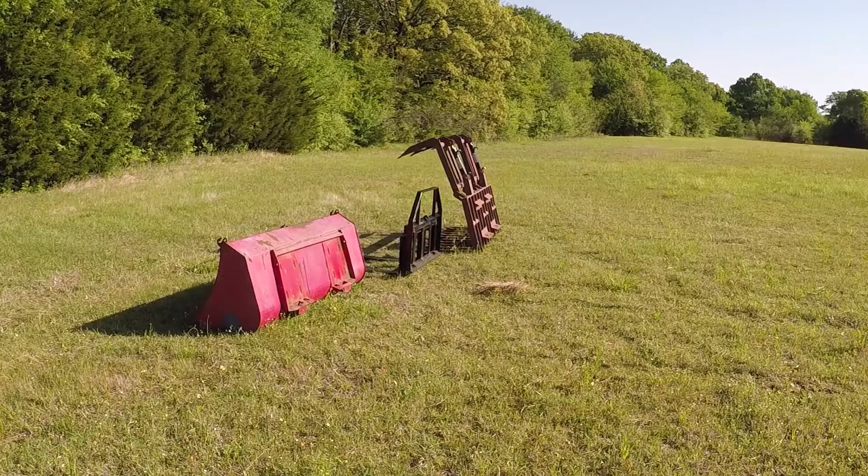In this video I'm going to tell you everything I know about the skid steer quick attach system, my tractor equipped with it. I built two attachments, a pallet fork and a grapple with hydraulic jaws to fit this system, and it fitted perfectly, both of them.

The reason for this video is to save you some trouble if you build your own attachment, so you build it universal and it will fit any skid steer quick attach like this setup over here. My understanding, Bobcat invented this setup and they called it the Bob-Tach. The patent expired in the mid-90s, I believe, and all the companies got together and they decided to standardize the system. So if you buy a tractor or a skid steer, any attachment that you could buy that's designed for this system should fit it.

However, from my experience, I visited several dealers for equipment like this, and I discovered there are little differences in dimension. So if you have a tractor like this one or any other tractor, and you build an attachment tight fit to go on this system, in the future, if you upgrade the tractor or the skid steer, the attachment that you built may not fit the quick attach system that you have. I will take the camera closer and I'll explain to you about these dimensional differences.

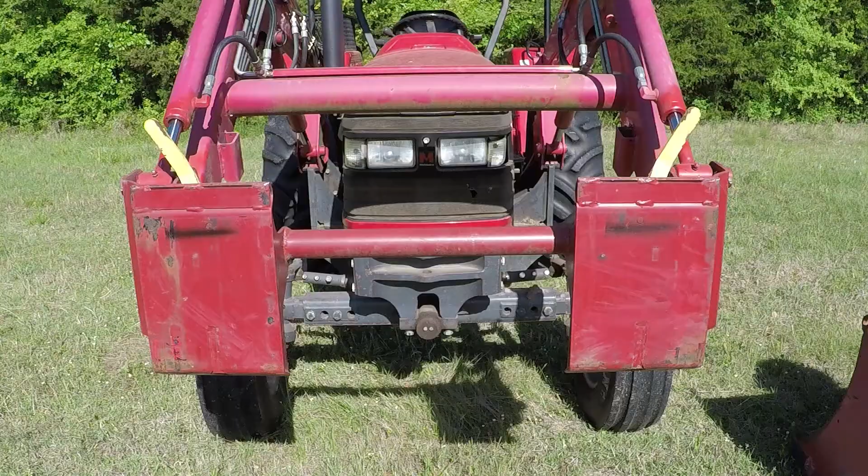I repaired this setup a few years ago. I had a little incident with the tractor. This side came loose and it got twisted. The original pipe was twisted real bad. There is a Mahindra dealer close by. I went over there and took some measurements, and I put this back to Mahindra specs. And I also fixed the pins back then. They were tight to operate. Now they're smooth.

I took measurements from several tractors and skid steers equipped with this system, and I discovered there is a little variance in dimension. For example, this dimension over here on the attachment that you build needs to be a minimum of 45 inches, the inside dimension, because the tractors or skid steers vary a little. I see them anywhere between 44 inches and 44.5 inches.

Also, this dimension, the minimum, from the point where these two sides meet to where this over here meets this surface, needs to be 16 inches. On this tractor, it's 15 3/4. So in the future, if I buy a tractor or a skid steer, and if I build the attachment tight fit to this one, and the new tractor or skid steer measures 15 7/8, the attachment I made will not fit it.

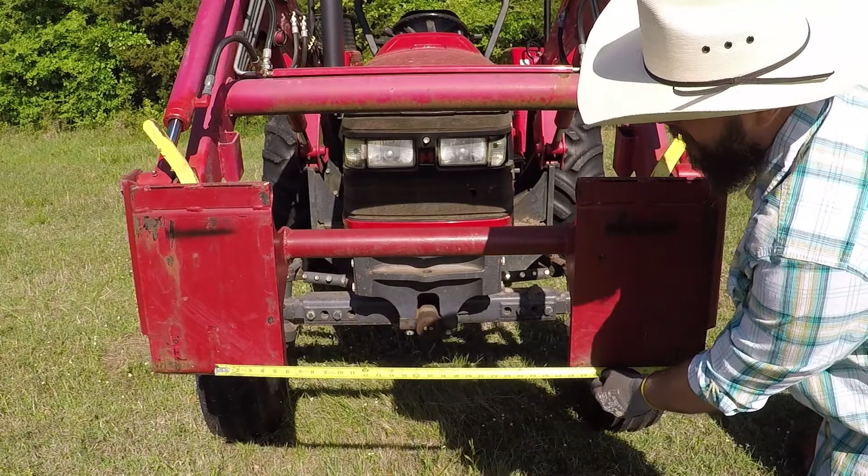Also, center pin to center pin, if you read documents online, some of them show it needs to be 31 inches, some of them show it needs to be 32 inches. On this tractor, it measures 33 3/8 inch. I'll take the camera to the side and I will provide you the dimensions over here for the angles, and then I'll show you a few things on the bucket.

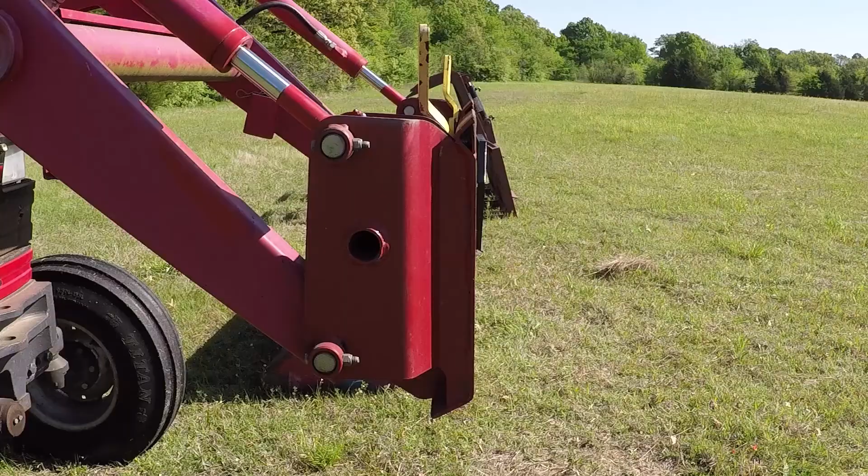The angle at the top measures 45 degrees, and the angle at the bottom measures 120 degrees. The pin diameter is 1.25 inches and it's tapered. It could actually lock the attachment anywhere from 1/2 inch to 1.75 inches. The standard is supposed to be 1.5 inches from this surface, so you will have no problem locking the pin because there is a spring over here, and if you build it tighter than 1.5 inches, you may have a problem locking the pin in place.

The attachment companies consider the variance from center pin to center pin, so the pins will drop here and will lock. That's why they put slots. This one over here measures 27.5 plus 1.25 inches from center pin to center pin, so this could support a minimum center pin to center pin of 28 3/4. The outside dimension is 35.5 inches minus an inch and a quarter.

This could support 34.25 inch center pin to center pin. These over here, these small slots, Case came up with a few tractors. The quick attach system for them, it's 36 inches from outside to outside, and center pin is 21 inches.

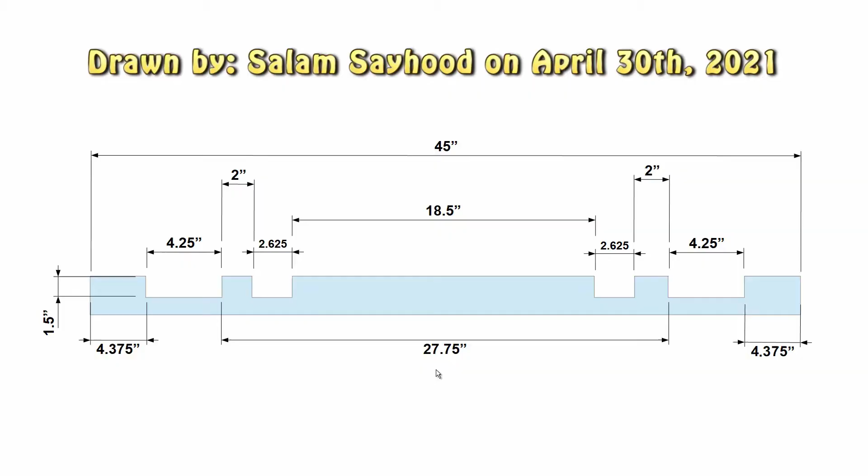I'm going to show the dimension in inches first, and then I will show them in millimeter. I used Windows Paint program to make all the drawings. The CAD program that I have, the number doesn't look right, and I thought I'd try my best to show them big, so somebody can take a screenshot in case they want to build their own attachment.

I'm starting over here with the bottom flat stock, the one that supports the lock-in pin. You could use any flat stock from 2 inches to 3 inches, 3/8 thick to 1/2 inch thick. I suggest to use 3 inches wide by 1/2 inch thick, because after you make these cuts, this will weaken the flat bar over here.

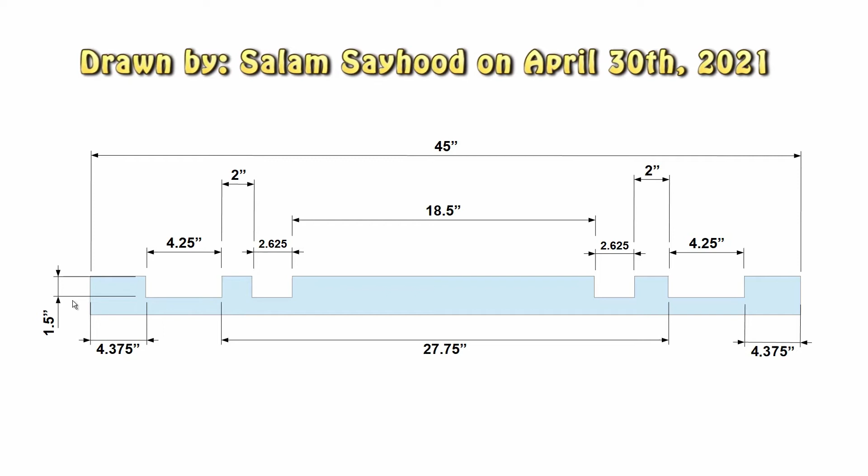The depth of these cuts, I've seen them anywhere from 1.25 to 1.5 inches. I found out 1.5 inches will give you a better result, and the lock-in pins will go easy. These dimensions ensure this attachment will lock on any center pin to center pin if you have the skid steer standard quick attach from 29 inches to 35 inches, and if you have Case tractor setup, it will support center pin to center pin anywhere from 19.75 to 22.5 inches.

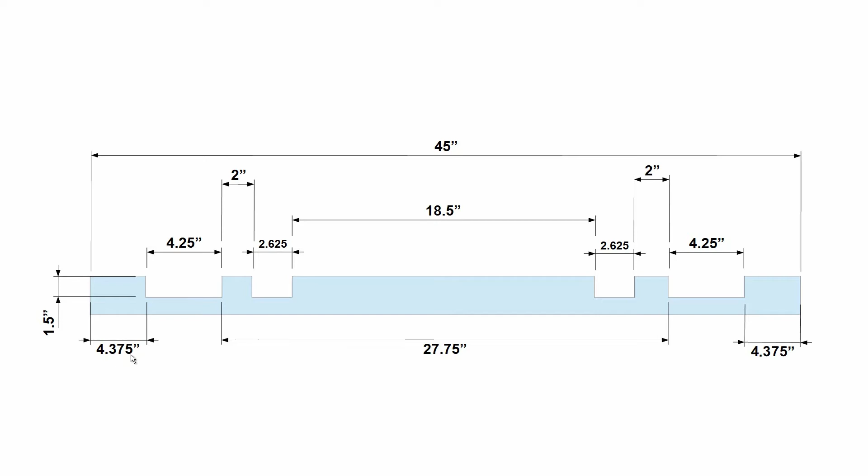The minimum dimension needs to be 45 inches to ensure the skid steer quick attach will fit easy on your attachment. If you're not familiar with the decimal point, this is 18.5 inches, 2 5/8 inch, 4 1/4, 4 3/8, 1.5 inch, and 27 3/4 inch.

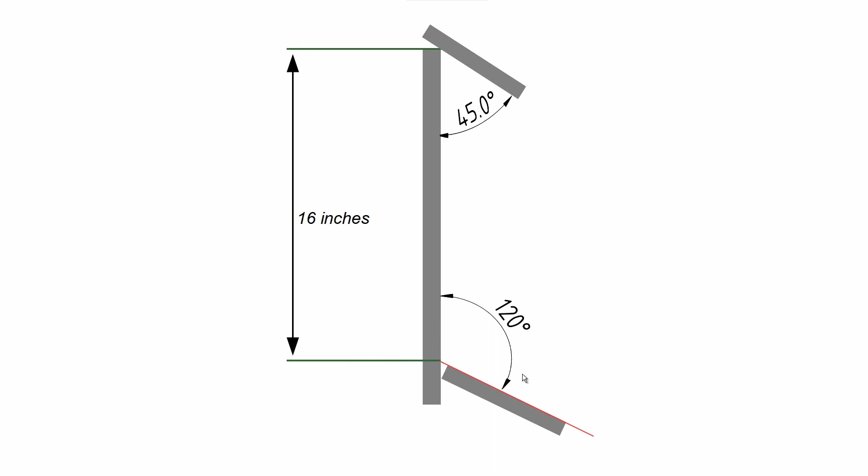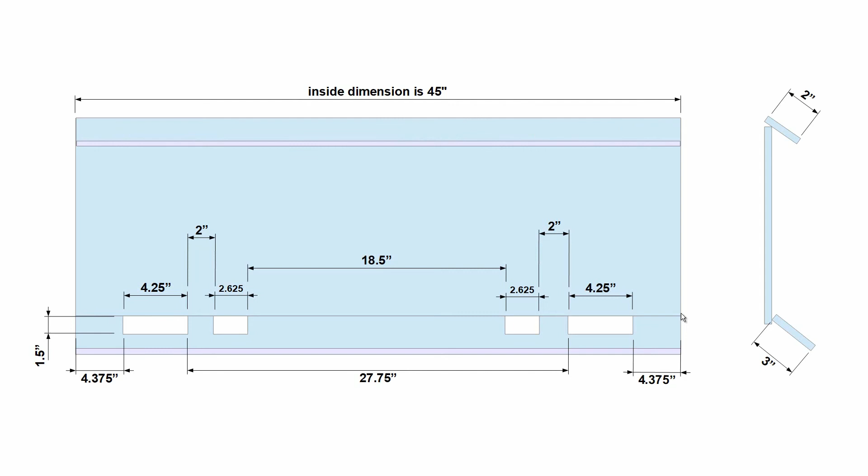This is a back view of the complete attachment, and this over here is a side cut of this. This is the top flat stock, and this over here the bottom flat stock with the cuts. You need to make sure the inside dimension is a minimum of 45 inches. On my tractor, the way they built it, the top part measures 45 inches from inside to inside, and the bottom flat stock measures 46.5. I find this unnecessary. If you build everything a minimum of 45 inches from inside to inside, you could square it easy and you could weld it easy.

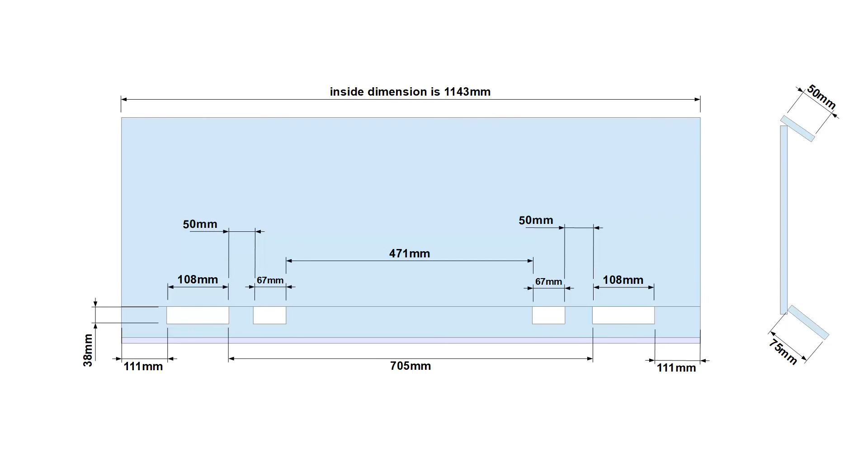The following pictures will show the dimensions in millimeter. This one over here, you could make the measurement 470 millimeter or 471 millimeter, and the quick attachment will fit easy. And this over here, the back view in millimeter. I hope you find this video informative.